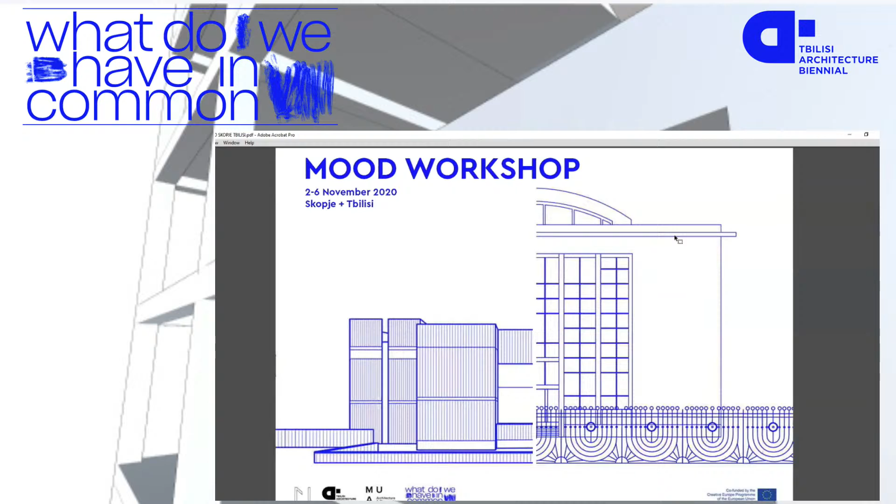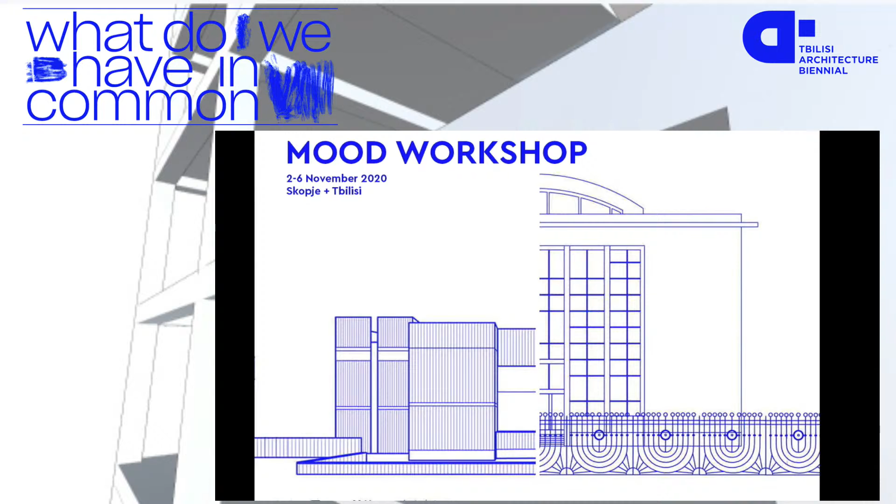I will start now with the presentation, sharing the screen. This is our main poster, which was firstly the building and location of Skopje, but now we made it half and half, with half of the building in Georgia. So the aim of this project was to present a partnership program between the two cities, Skopje and Tbilisi.

I will start now telling you about the location in Skopje. It's a student dormitory, the biggest student dormitory in the country, characterized by its brutalist architecture, which is very popular recently and attractive to foreigners also. But unfortunately, the public space around the building is very poor with activities that can bring youth together, first of all, and then other citizens.

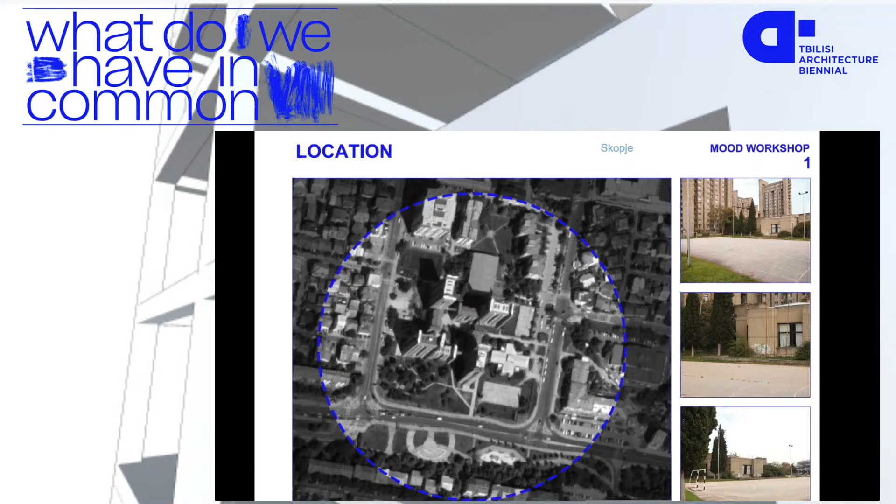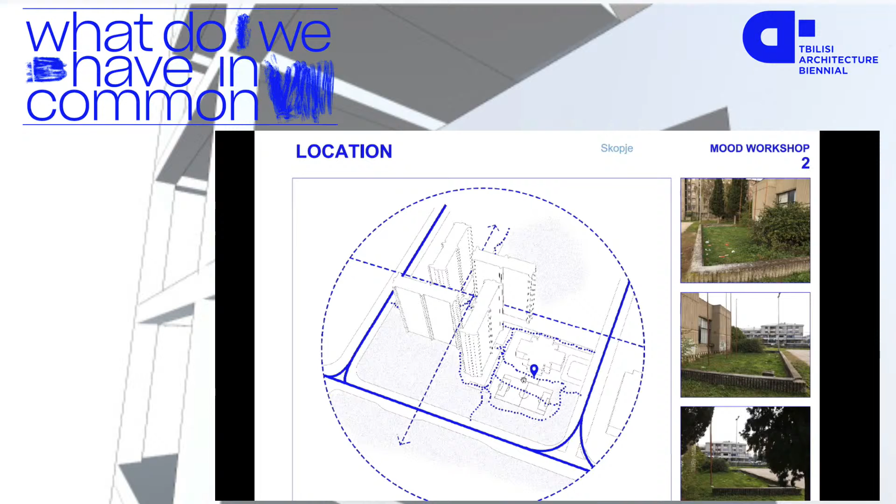Students analyzed the space around it and understood that the main movement around the place is pedestrian movement. This is something we really appreciate about our location, so we chose this small corner in front of the restaurant, between the restaurant and a football sport playground, to be our location. Now the students will start speaking about the project.

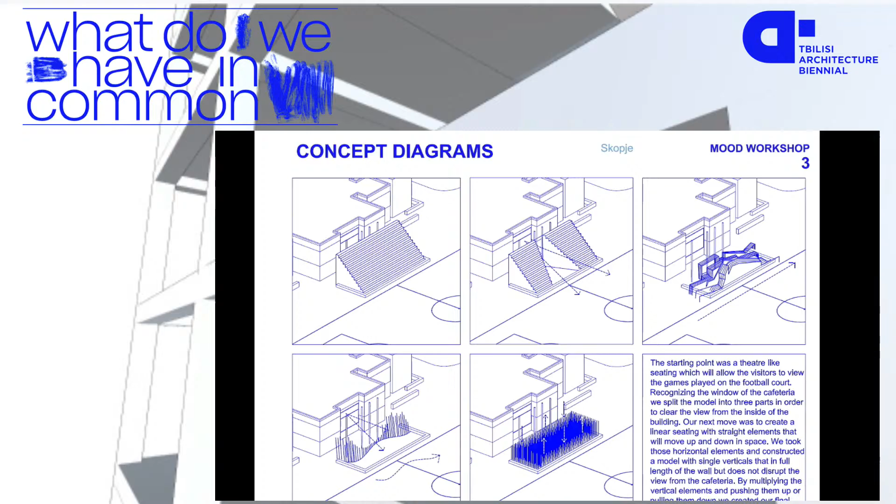Anastasija, are you here? Hi, sorry, can you hear me? Yes. Okay, so this is the process of how we got to our design. The first analysis is a classical theater, so we tried to make seatings for people to be able to watch games played on the football court.

Then we realized the cafeteria in the background has a window facing towards the playground, so we thought of opening up the space and not blocking the views or daylight going into the cafeteria. Then we tried some models with linear seating elements moving in the space up and down. We took those linear horizontal elements and turned them into vertical linear elements, going like a wave from a tall point to a short point and then to a tall point again. We tried multiplying them and pushing and pulling them up and down, and came to our final model.

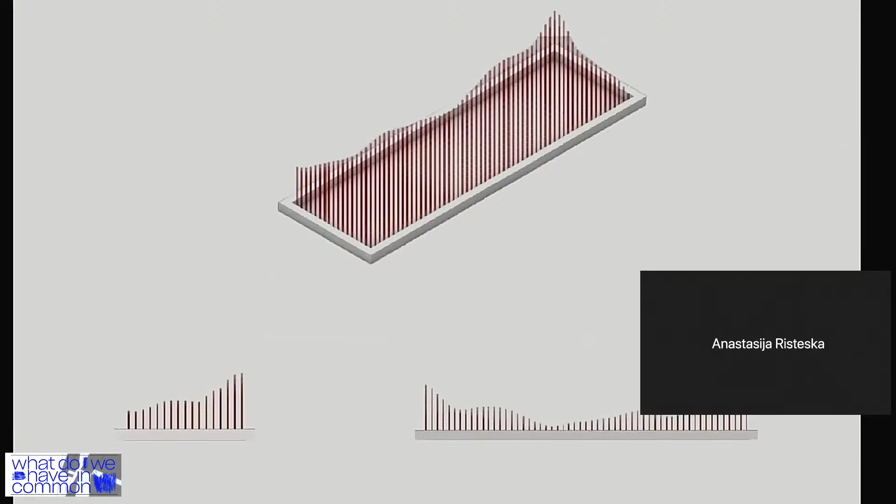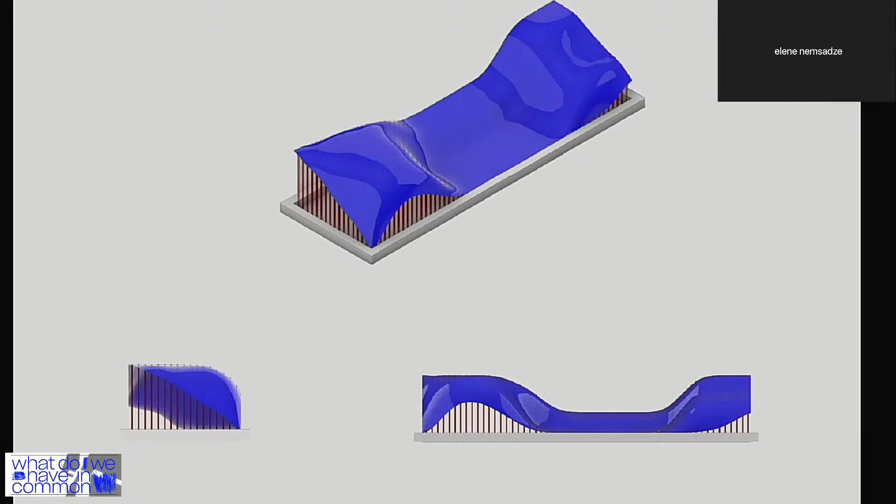Elene from Tbilisi: our group started to play with the forms to find the right one for the mood and atmosphere, and to match it to the facade, or to find the right shape. We tried a variety of possibilities, combining vertical and horizontal lines together to somehow find the right design.

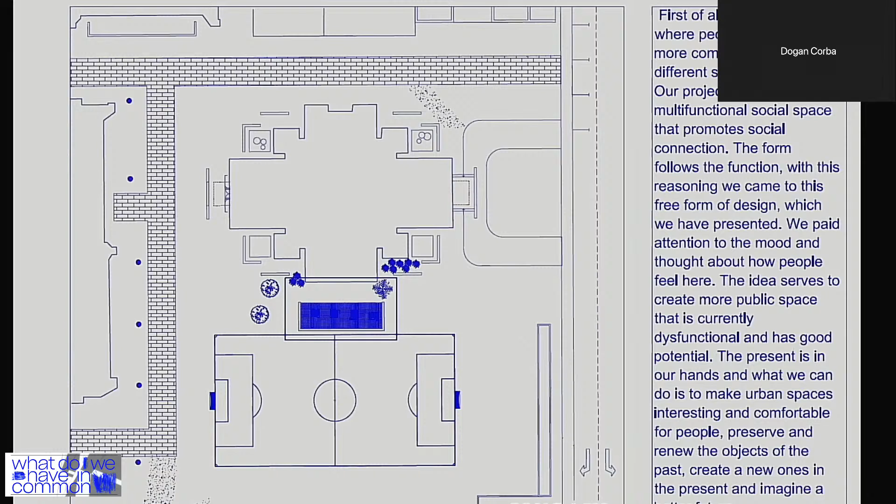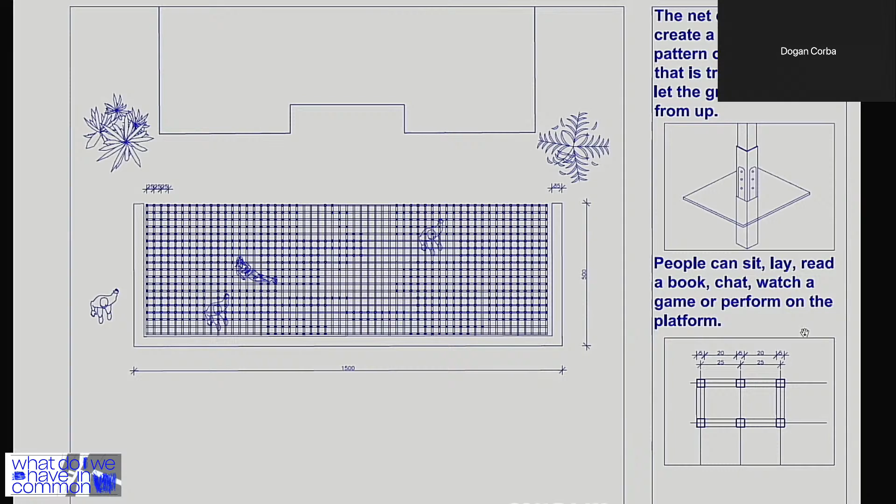In this slide, you can see the close-up situation of our location, which is 15 by 5 meters. When we look from above, it looks like a net, which can be symbolized as connecting people and the different heights, the different moods of people. On the right bottom, you can see some details showing the distances and dimensions of the wooden columns and how they're connected to the ground with metal bases.

This dynamic as well as transparent form gives you the freedom to behave the way you feel and use it in the way you want.

The model is functioning like one single monumental sculpture with its wooden structure, which unites with the green environment or nature, but contrasts with the surrounding concrete buildings. Still, by the section, you can feel the modularity of the model with which we intervene and bring a new soul to this space. And somehow we let the facade that is in the background breathe and do not hinder its visibility.

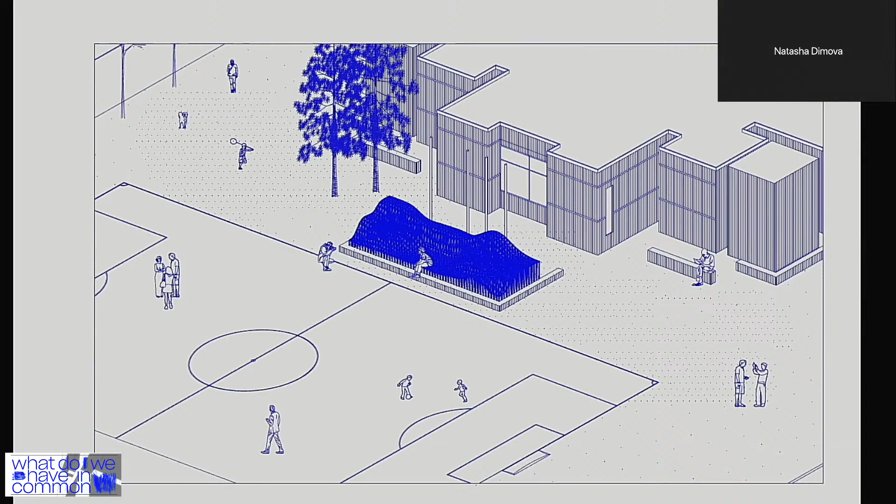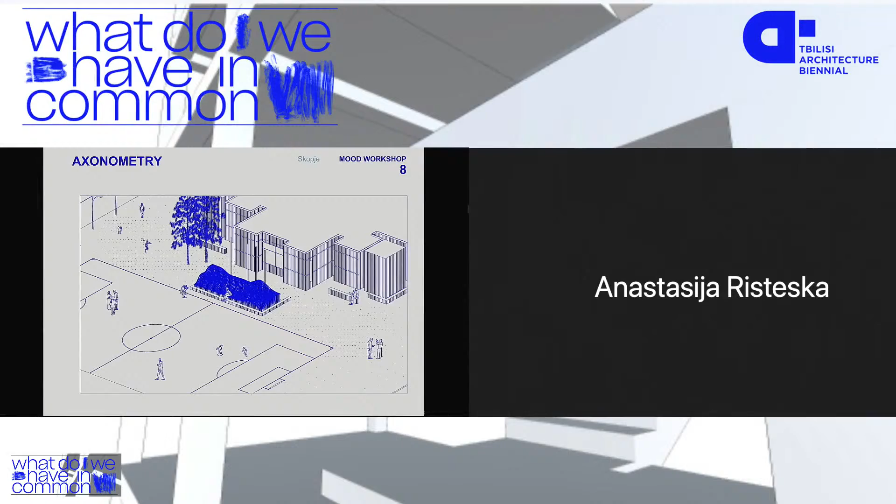Here we can see the model in visualization. We can clearly see that it's not blocking the cafeteria in the back, and also we can see its connection with the surrounding.

Our structure is representing the wave and the hill at the same time. It can be seen as you wish. It can represent the chart of different moods, or even the way of how the music spreads from the middle point, which can be used as an actual scene for many different performances. The wave follows the amphitheater geometry, and it represents the place for the audience which is watching the events on the field, or point of view and place for performance.

Sarah, we can hear you. Tamari and Zizi, if they want to add some words at the end, like a conclusion.

Our goal was basically to create something really simple and minimalistic, but yet it should have been dynamic and vibrant. So yeah, this is the idea we came up with, to have static pillars which create various curves along the original concrete wall.

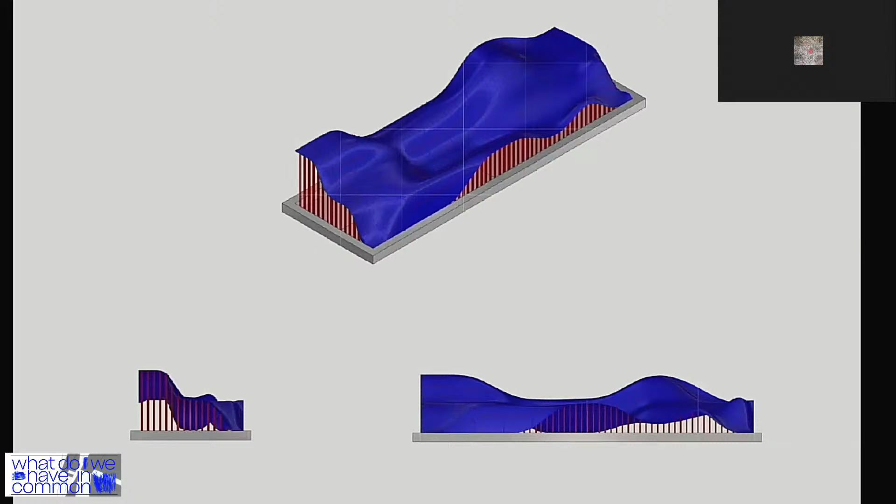This design is really transparent and light, but also it kind of resembles the surface of the building behind it. And this is kind of an amphitheater, which can be used for various events, student gatherings, for hanging out, and so on.

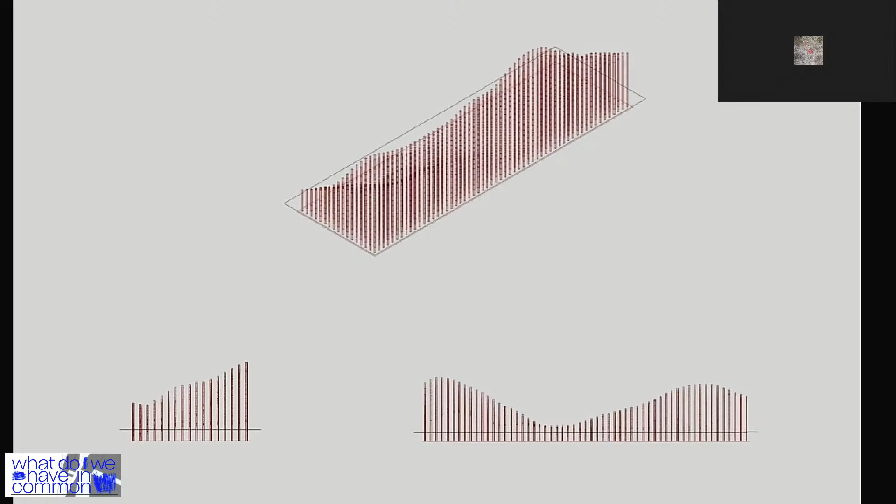Zizi? Yeah, that was me. That was you, I'm sorry. Do you want to add something?

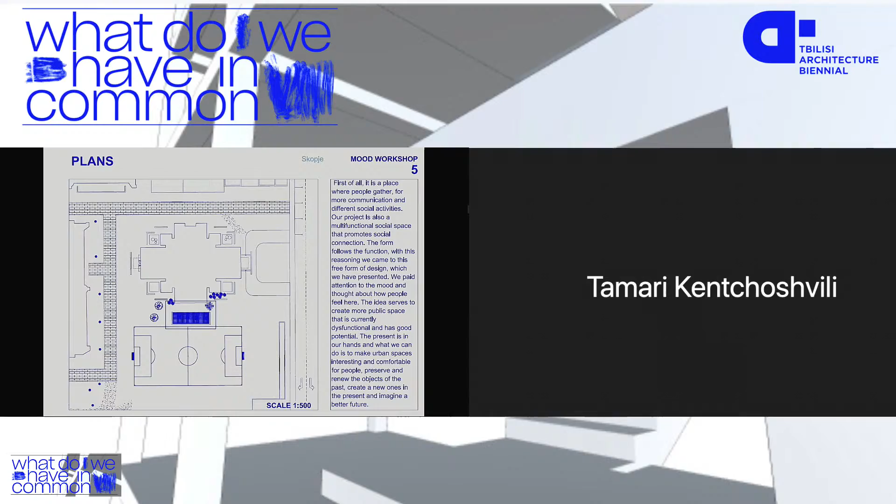The whole process was very interesting. We did a social, geographical, cultural analysis, and we decided to make this space interesting for people because it really has good potential.

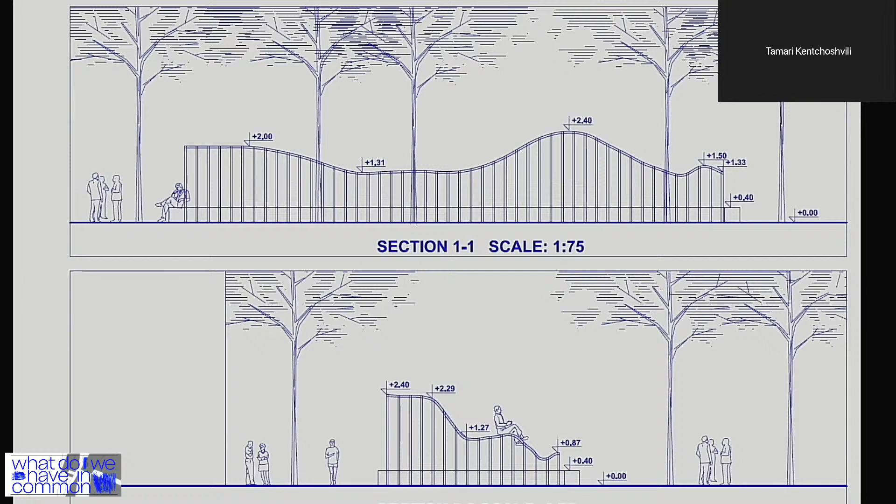While working on this space and this project, we started thinking about the concept of what we needed here. This is a public space, and we have discussed all the possible options of what serves the idea of a public space. First of all, it's a place where people gather for more communication and different social activities. Our project is also a multifunctional social space that promotes social connection. The form follows the function. With this reasoning, we came to this free form of design, which we have presented.

We paid attention to the mood and thought about how people feel here. The idea serves to create more public space that is currently dysfunctional and has good potential.

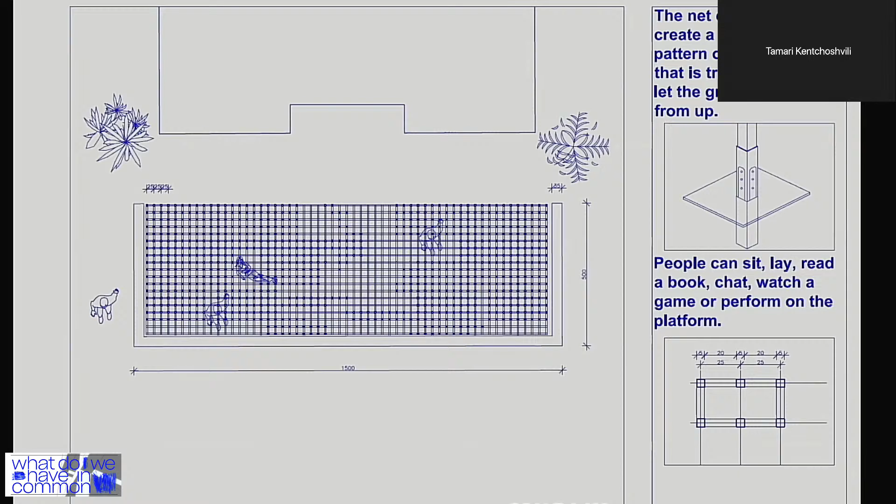We thought that the present is in our hands, and what we can do is to make urban spaces interesting and comfortable for people, preserve and renew the objects of the past, create new ones in the present, and imagine a better future. Thank you. Thank you very much.

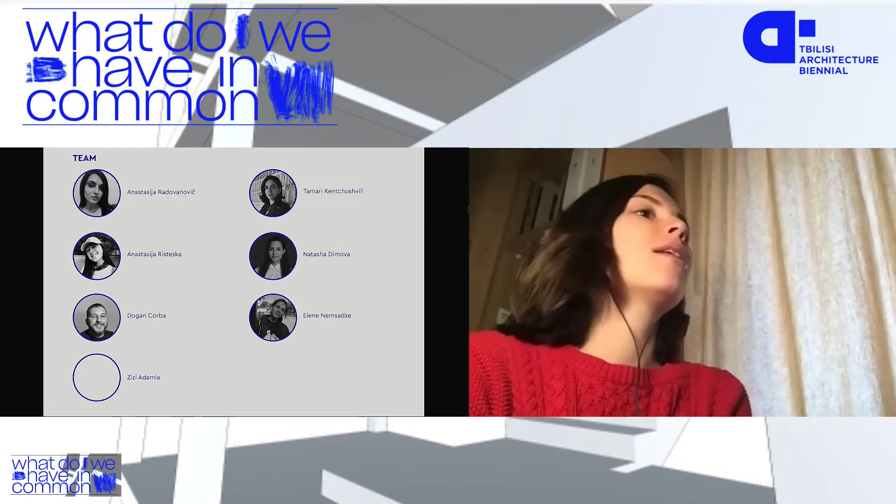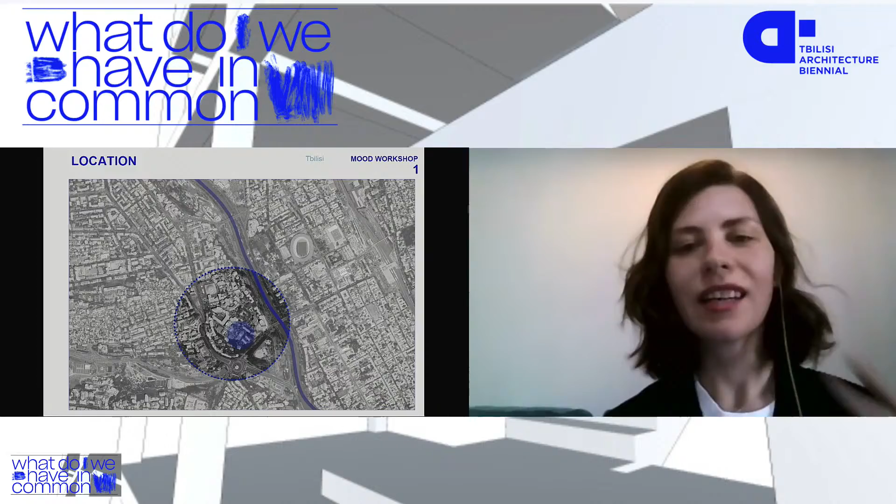It was really interesting to mix two countries and the groups as well in terms of this workshop. The most important side, we think, was the mixing and discovering some similarities between those two countries during the week. We've had many interesting speakers involved, telling us more about their experiences and sharing ideas, which was really, really interesting. We will also highlight that we think it went really well.

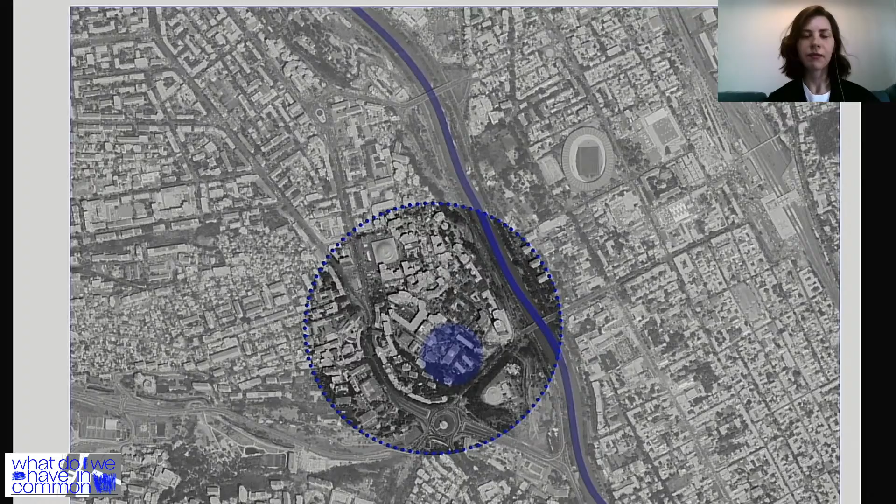So the site is one of the buildings of the Academic Gorodok, the city of academics, let's say, the science library. We chose this area because of its story - because now it is not as accessible as it was before, but it is still visited by the neighborhood, as it is in a very residential area. We wanted to make some challenges and try how we can make this space more attractive, more relaxing, or more interesting for the visitors of the library and the people who live in that neighborhood.

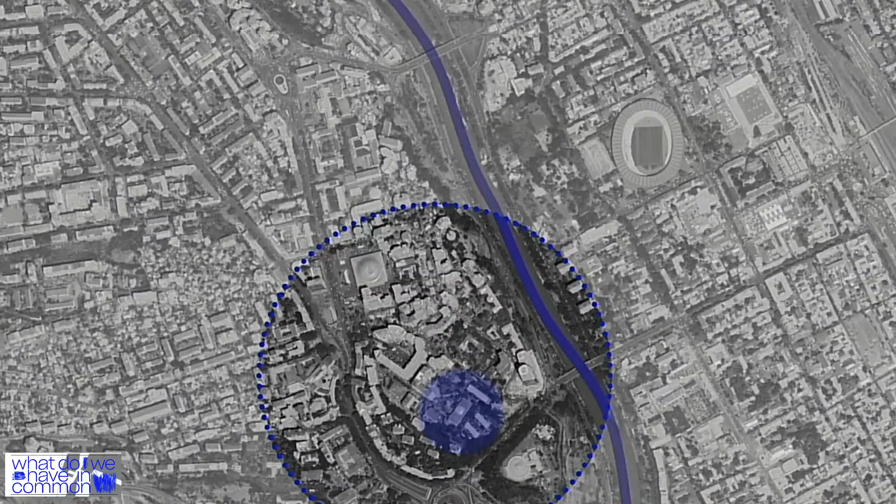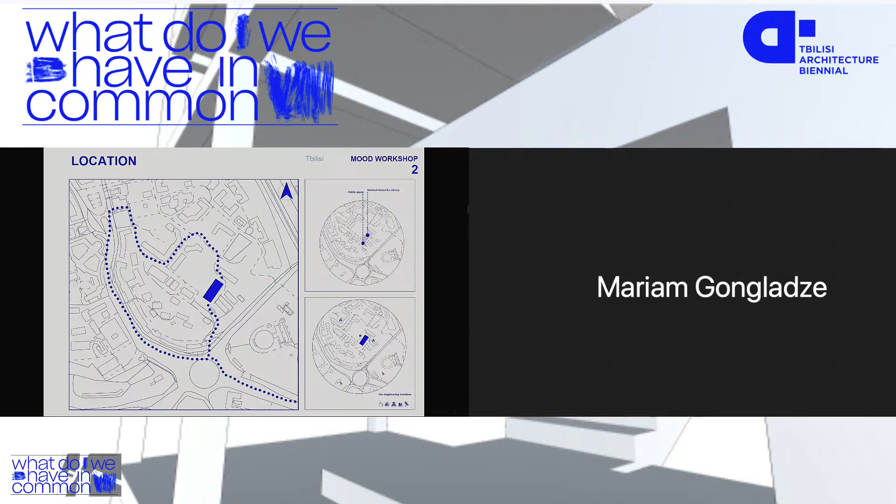So the team will present. Mariam, will you start? Yes. As mentioned before, our project site is located in the courtyard of the National Scientific Library of Georgia, which is located in a very chaotic neighborhood of Tbilisi. I want to mention that it is one of the busiest parts of Tbilisi, yet it can be isolated and create a very calm atmosphere at the same time.

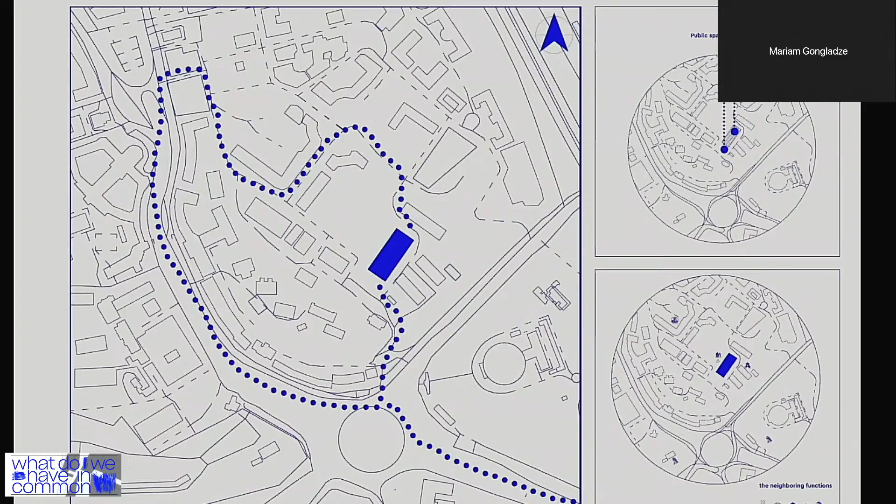One of the main reasons is accessibility, because currently it is accessible by two main roads, as you can see on the diagram - one pedestrian access and one vehicle road. For the context, as Maria mentioned, this was a former Soviet academic town project, and the National Library was established right after the USSR Academy of Sciences was founded. With the growth of the academy, the issue of establishing a fundamental library was raised, and it was positively resolved later. I think Elena is going to talk about it a little bit more.

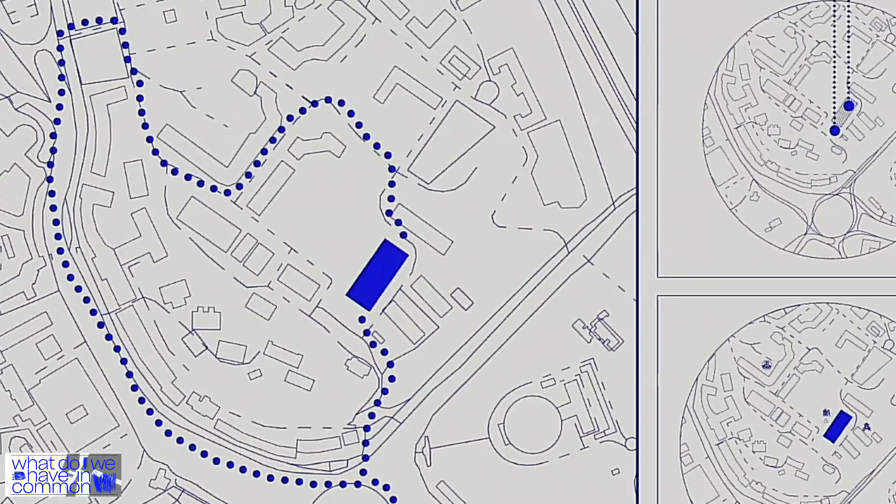Sure. This is now you can see the site of the building that we worked with. It was architected by Georgi Lezhava in 1970, and the surrounding project area that you can see now has a lot of different aspects that we wanted to show. First of all, the fact that it is mostly surrounded by residential buildings, and before the pandemic, the project area that we worked with was mostly visited by people who live in this area.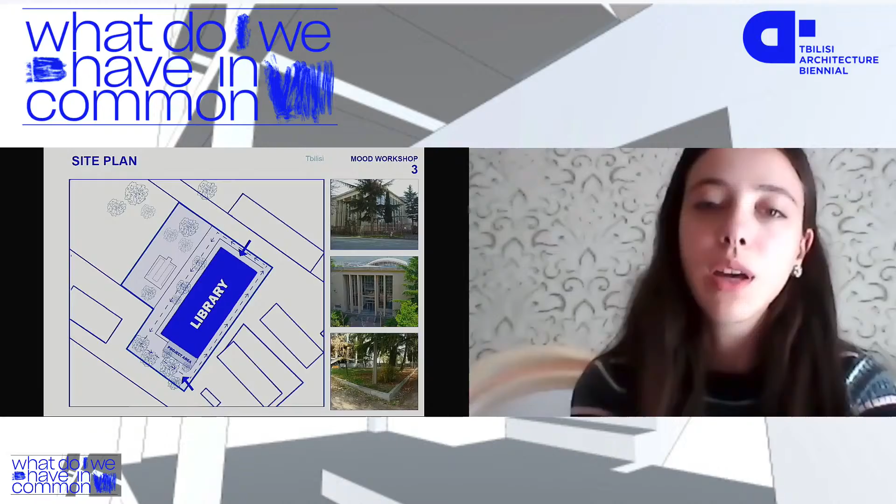Also on this map, you can see how you can access the library and the space. It has two entrances - one is when you can enter the library, and the other one is from the project area. There is a cafeteria, and as you can see, our project area can be accessed from the cafeteria itself, which is a very important fact for us.

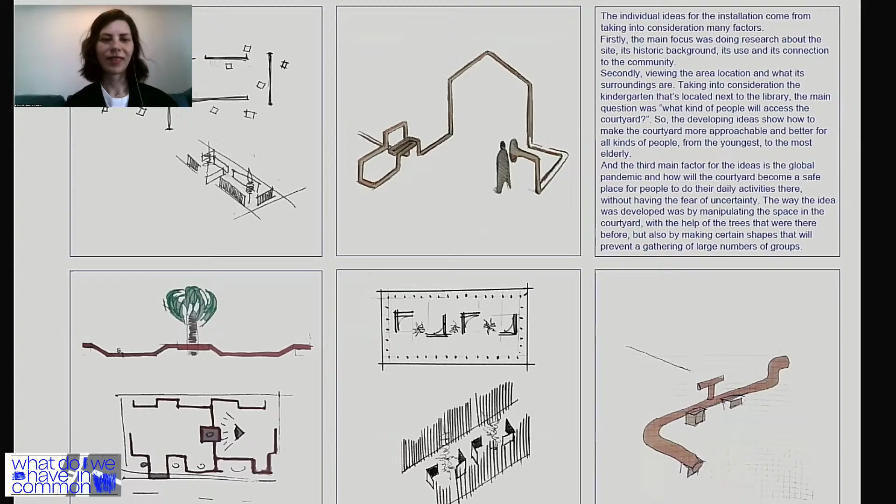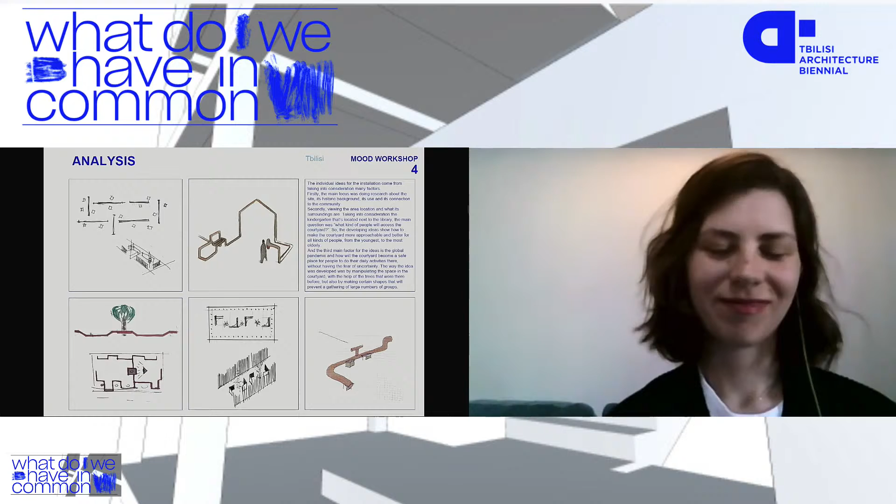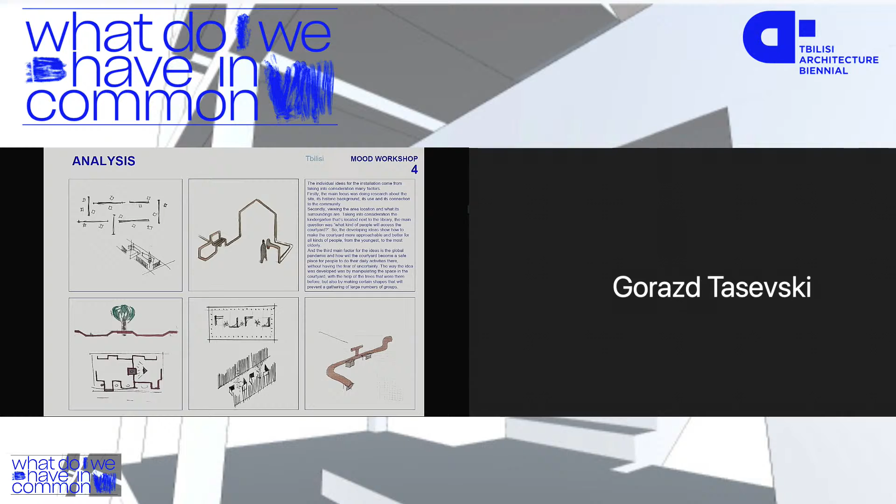Next page. Right, so the individual ideas for the installation come from three main points. Firstly, the main focus was doing research about the site - the scientific library, its historic background, its use, and its connection to the community. Secondly, viewing the area's location and its surroundings, taking into consideration the kindergarten located next to the library.

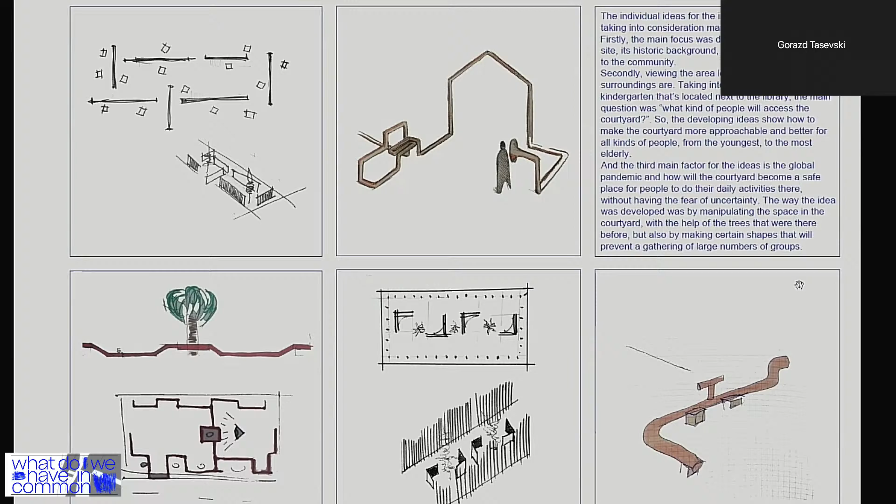The main question was what kind of people will access the courtyard, and the developing ideas show how to make the courtyard more approachable and better for all kinds of people, from the youngest to the most elderly. The third main factor for the idea - basically the most important factor - is the global pandemic surrounding us, and how the courtyard will become a safe place for people to do their daily activities there without the fear of uncertainty. The way the idea is developed is by manipulating the space in the courtyard with the help of the trees surrounding it, and also by making certain shapes that will prevent the gathering of large groups.

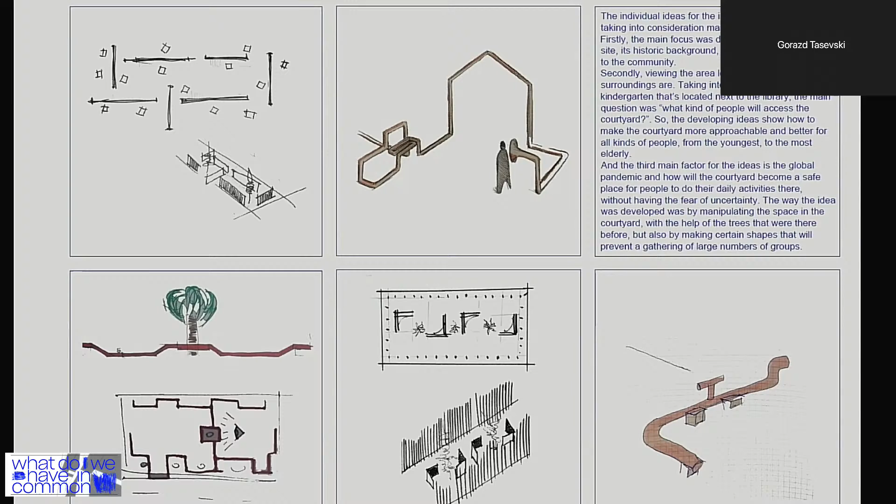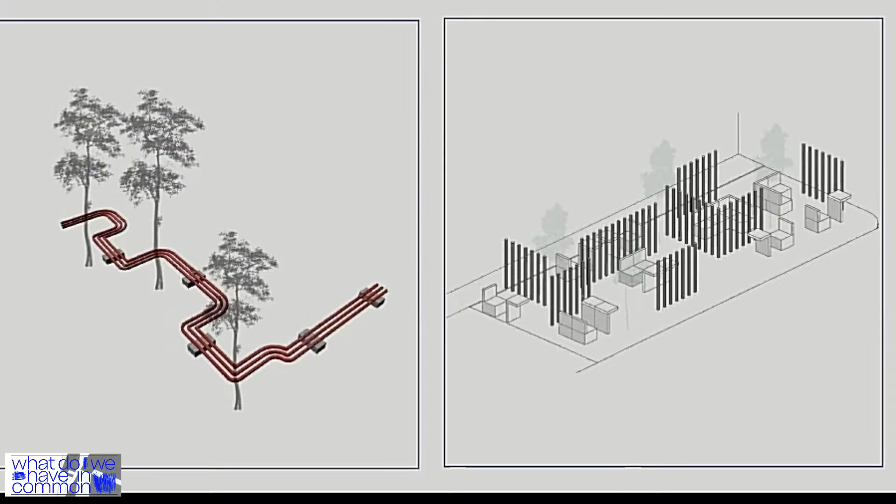Next page, please. The intervention is a confluence of the concepts of modularity and continuity, with the idea behind it being to bring the concentration of activities from inside the building out into the open. It brings attention to the courtyard itself and makes it more approachable for the community. There are opportunities for recreational activities such as play and socialization, as well as educational opportunities where visitors can participate in small-scale exhibitions, presentations, and take part in book exchange. The elements strive to achieve transformability through division and connection, and are able to be combined into a singular fluid shape.

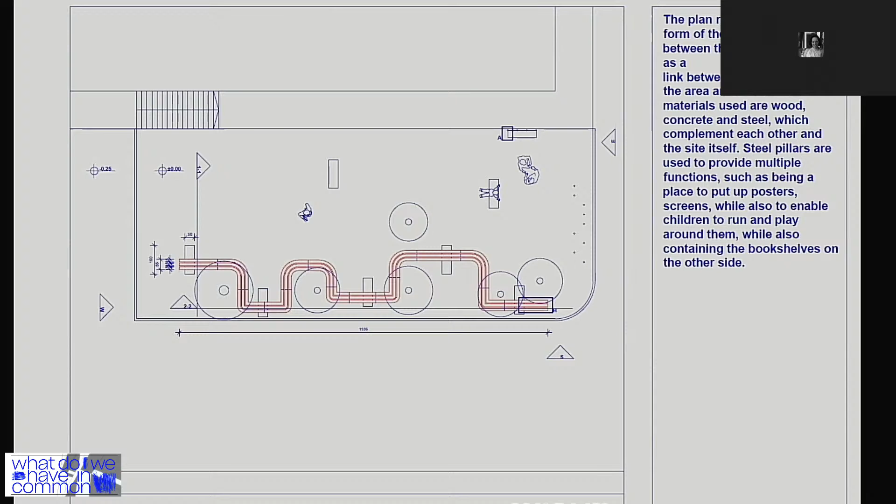As you saw from all the analysis before, this is the idea that came to be. The plan reveals the form that was decided to be taken, which is a continuous shape with a modularity. By modularity, we mean each part of the bench can be removed and taken to another spot.

The dimensions we were thinking of having it as comfortable as possible to be made and also to be used by people, in that way that it will be light and people can use it and misplace it however they want. The materials used are wood, concrete, and steel, and they all complement each other and the site and the elements found in the site.

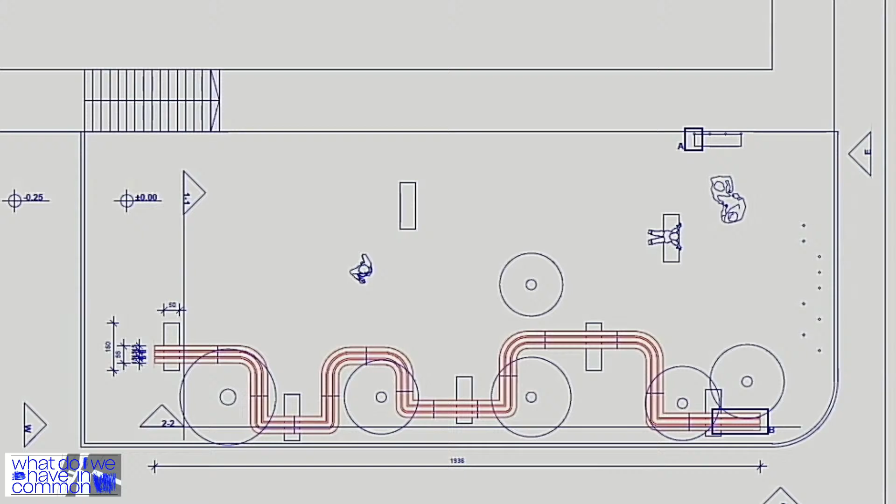The metal elements, which are the tubes on two sides of the location, would be used for putting screens, posters, or whatever it is needed to present, while also a spot for children or visitors to have some fun. The other tubes are meant for shelves, so people can leave books or take some books from the library, while the benches could be moved in place however they want, however it suits the location or whatever is happening there.

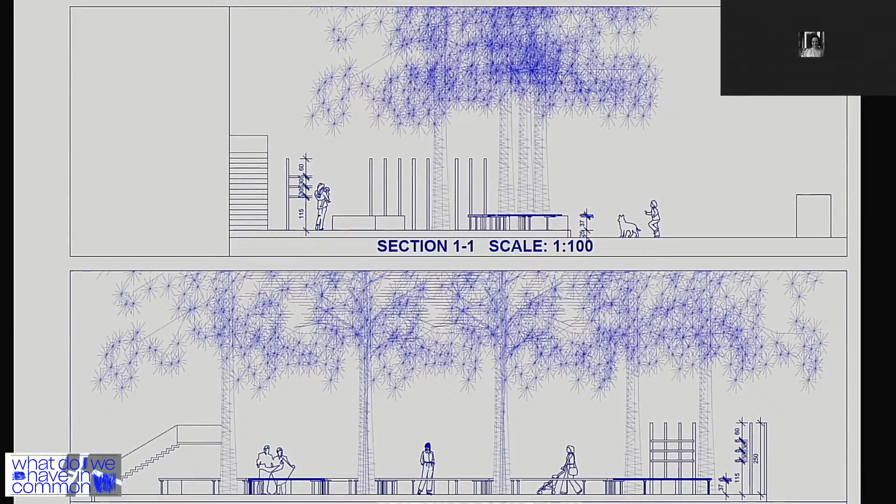In the next slide, you will see the sections and how minimal the intervention is and how softly it touches upon the location without imposing too much or taking the attention from the library itself and whatever is in the surrounding area. This is also presented in the next slide, which is the elevations or facades.

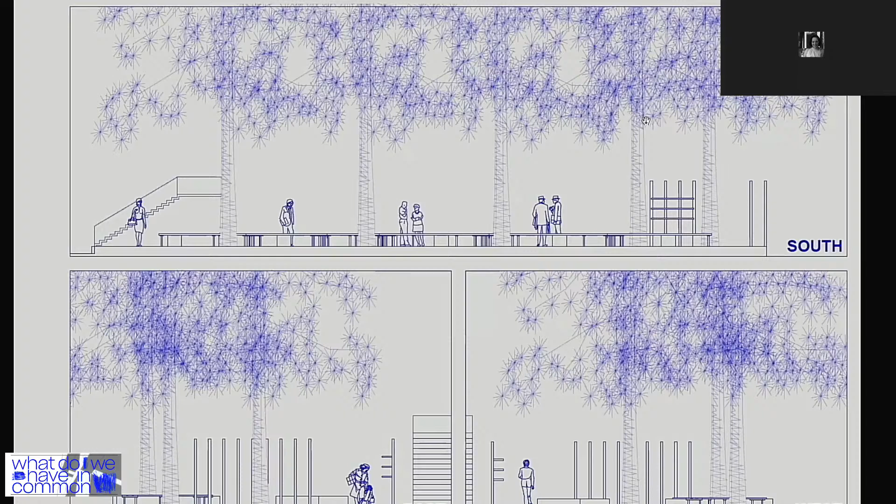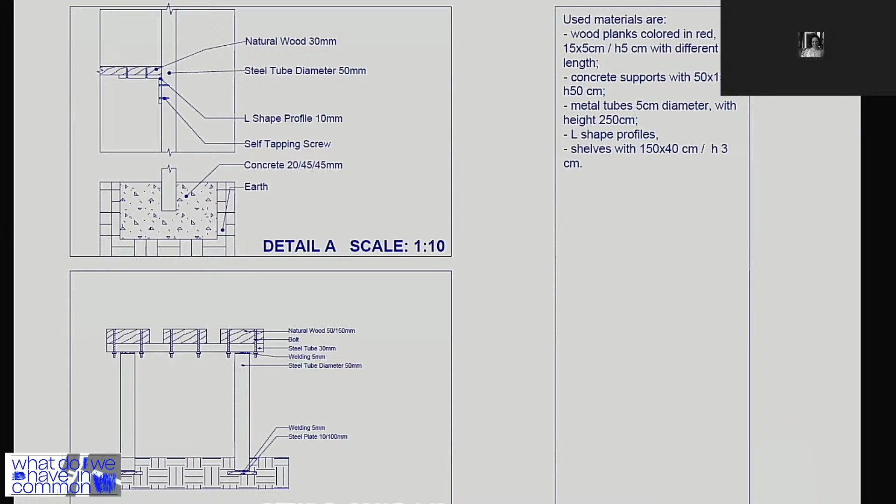And these are some of the ideas we had on how people could interact in the area. The next slide is the details, which we explained in detail, what kind of elements would be used and how they would be attached. The idea is to use natural wood and steel elements, which are very easy to find and very cheap to use, so it doesn't cost too much and it's not too hard for people to use and rely on it.

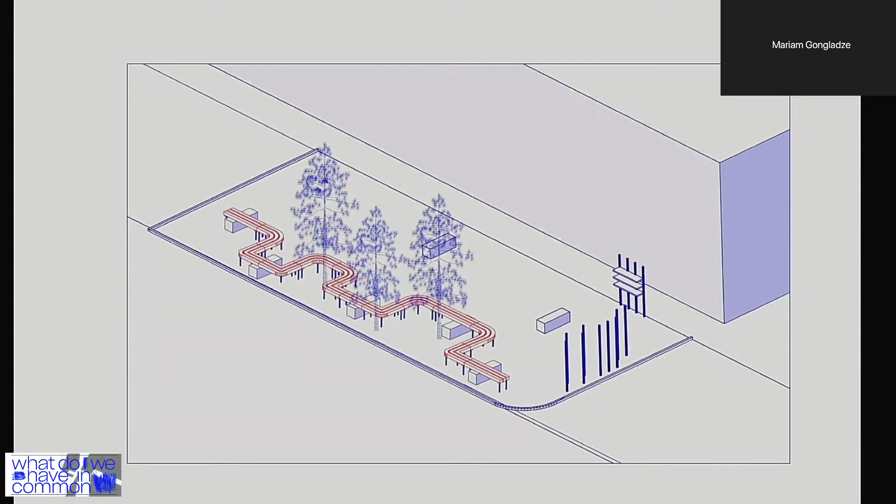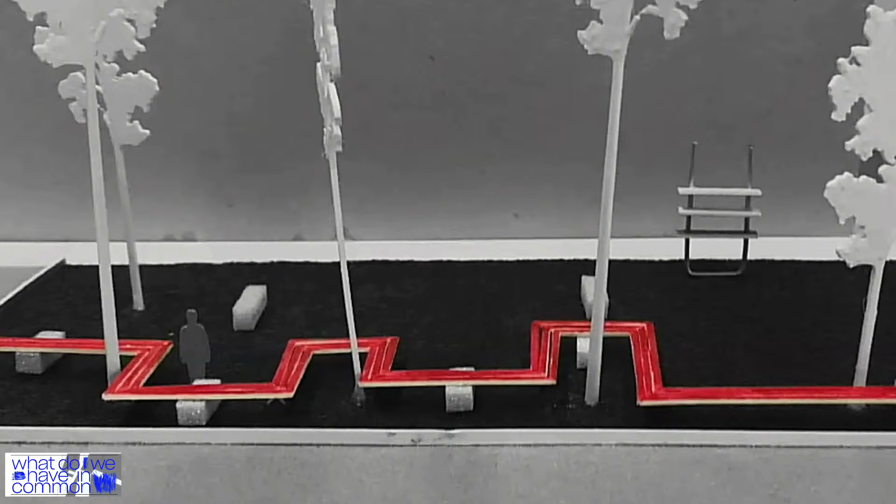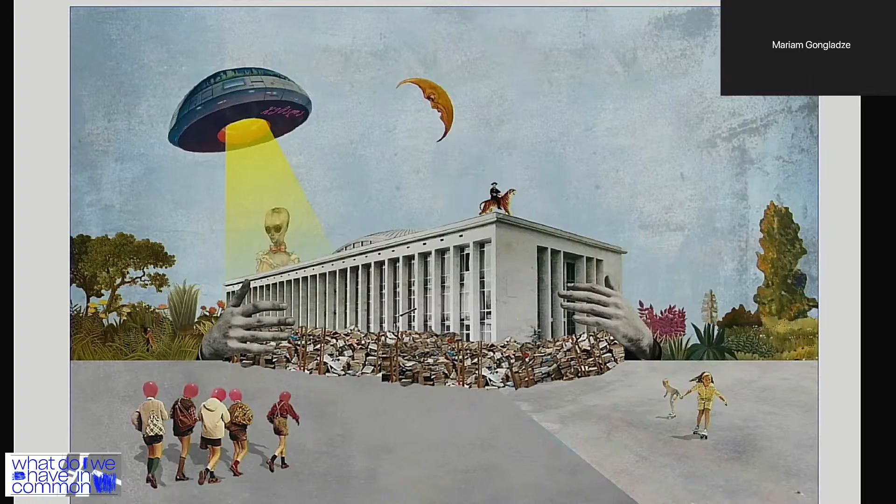These are also some models that we were working on during this working process, and some collages that we made for this place, and it shows our main target audience and the people that are going to use this place, the community space.

Yes, this is also a collage for creating the mood of this space in Tbilisi, and we assembled all of those collages together.

Thank you. This is the team that worked on the project. Thanks.

Thank you very much. It was interesting, a very nice thing together. Maybe someone who is following us now can ask some questions, and maybe also some of you want to comment as a final thing, something about the general work or whatever.

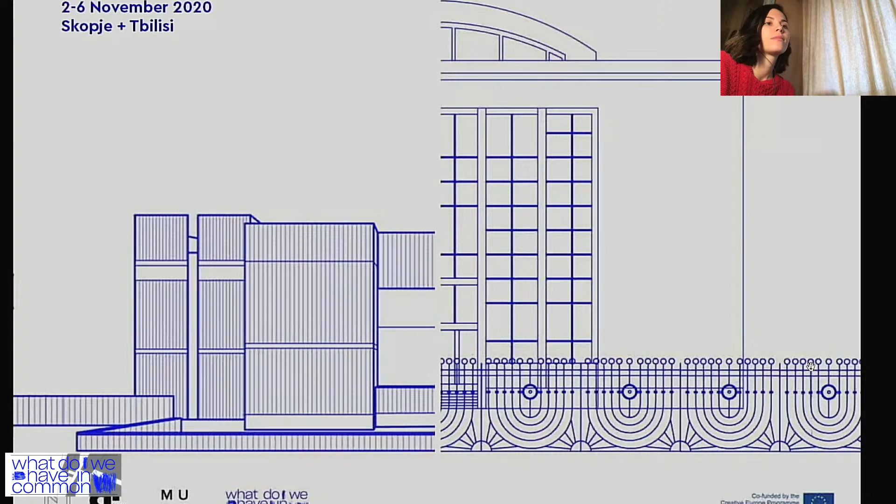Actually, we don't have at this stage the questions posted on our online platforms. How did you find working on the workshops in different parts of the world? That would be my question.

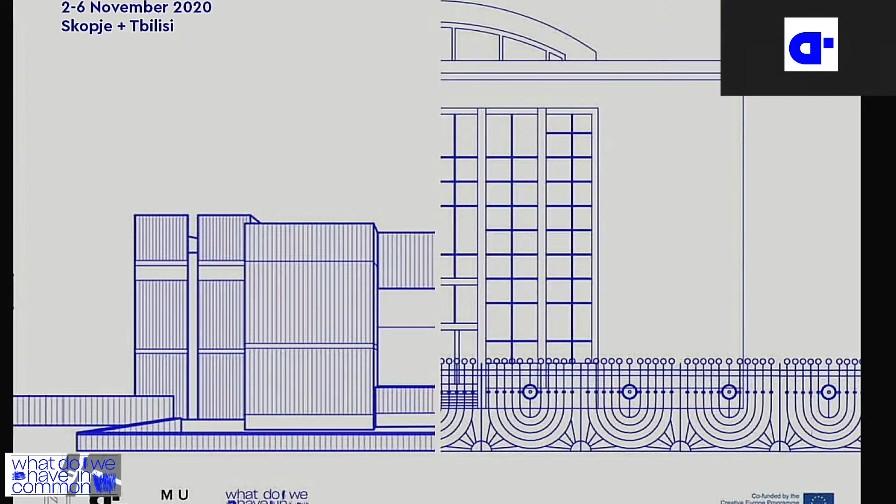Maybe some of the participants can answer.

I would say it was very interesting how limited we were in talking and communication, with everything done online, but we still managed to understand one another and contribute, getting our work done in a certain way. Personally, I enjoyed it very much, and I enjoyed working with the team; it was true teamwork, as I think every teamwork should be. I'm very glad that we got to see a different side of a different city, a different country, and a totally different environment, which is so different and yet so similar to ours. We touched upon many subjects, and in the end it turned out that we're not that different, that we have many things in common, even though we're in two parts of the world.

Great. Thank you. Is there anyone who wants to add on that?

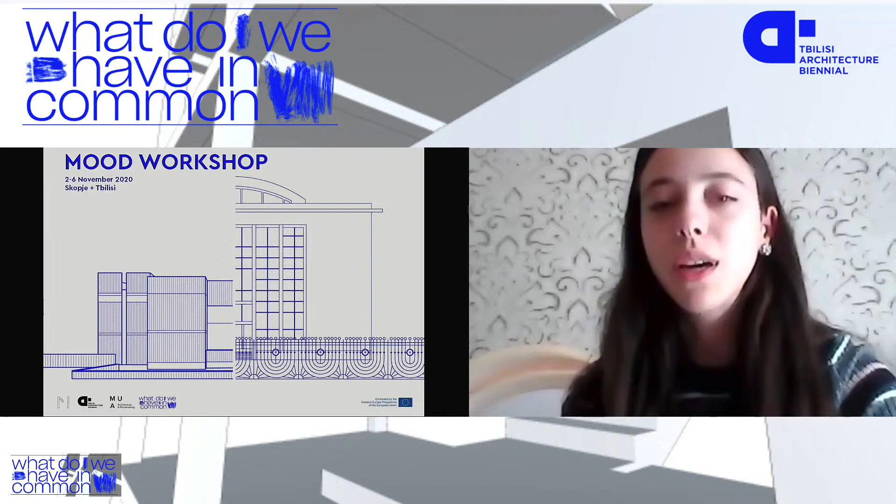So I'll just end here, and maybe the students also can share their thoughts on how we came to this. I can say a little bit about how we were getting inspired. First of all, it was the building itself and all the surrounding areas. We started our idea with research and tried to find some shapes and forms that would connect us to the library even more. And we came up with this idea of a pool and the structures that were inside, and somehow recreated it into a new project.

And how about the team in Skopje? I have been in Skopje once in my previous experience, and I found it quite an inspirational city. I think you could find a lot of places with inspiration there, especially for this workshop. But what was your inspiration in that case?

Someone from Skopje wants to say something from the team? Actually, we were inspired by so many things from different aspects, first of all our building and the surroundings. Then we started to think about the workshop. It's called Mood, and we decided to see how moods can affect our inspiration, and we started like that, and it led us to this point.

Does anyone else want to add something, Sarah? Yeah.

Maybe I can ask the participants also, did the speakers also inspire you in some of the design process? Was this important, or do you think we could have done the workshop without the morning lectures? How was your feeling about that?

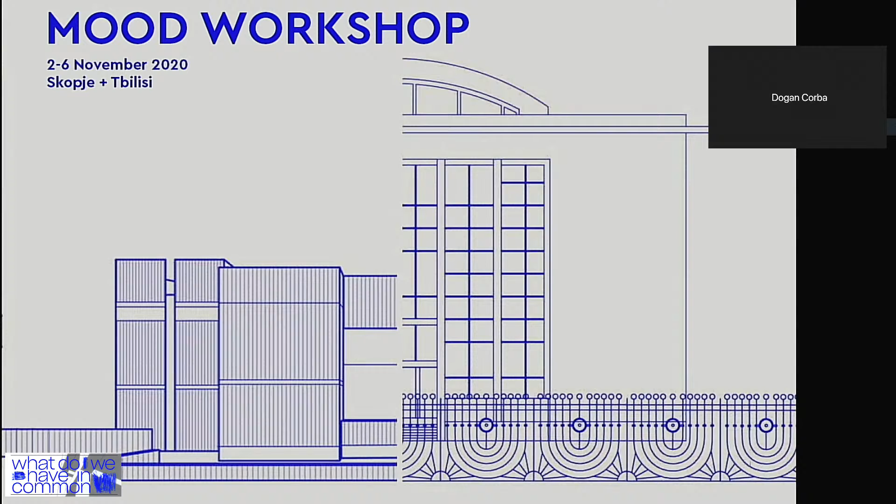Okay, I will ask again. What are the next steps, if any? Or do we close the workshop with this presentation? Do you foresee anything, rather than having it on a physical space presentation, for the continuity of this workshop?

You ask me? We can start with you, and then we'll ask George and Tim also. So the general plan is that these installations will be built up. We have some budget for it, but maybe this budget will be short, so maybe we'll work a little bit to find co-finance for the interventions.

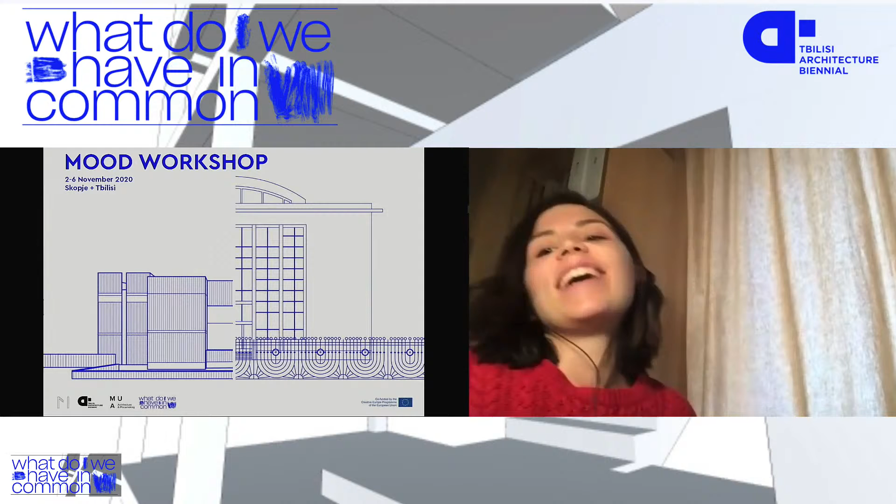So we will meet all together next year, hopefully physically, to build up these installations on site. And we hope that through this long process from design to building, maybe we will become like a big international studio, a big Mood family, that hopefully some other small groups will start growing inside, and people start connecting, and different stories will get born outside of this project. So we just don't know. We just put the seed into the ground, and we will see what we'll get from it.

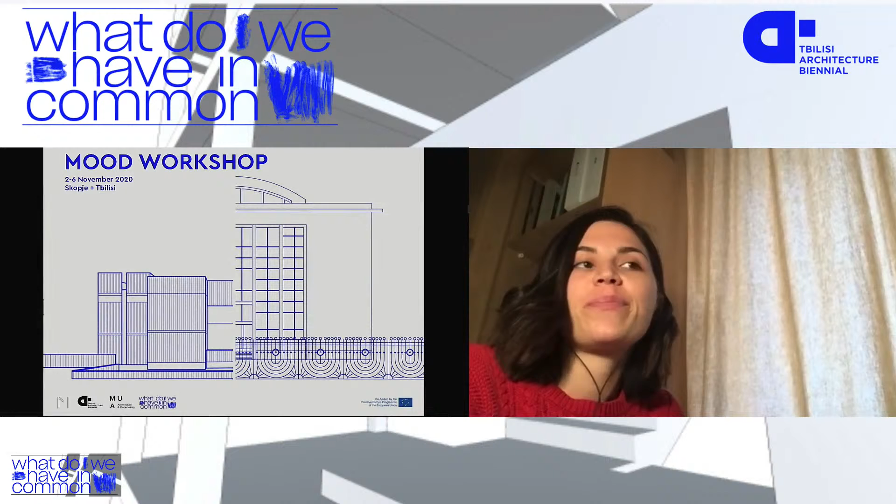Great. I think this is a very interesting workshop, and one of the participants, apologies, I don't remember the name, already mentioned so many things we have in common, and at the same time so many differences. There is another question from Mu Architecture and Placemaking.

Natalia, is it you posting the questions? Asking what were the challenges you faced working online? So it's maybe not me, but we'll start our answers with you. Maybe. What were the challenges, is the question.

Well, I think finding the similarities and differences was one of the challenges, but it was really also inspiring how during the process we all became very close to each other. I think I will miss every one of the guys who were participating in the workshop. I don't even imagine how I'll start my day tomorrow without them already. So yeah, it was really challenging to produce work with a team you don't know.

When you don't know people and you just meet them for the first time, you're moderating the ideas. For me it was challenging to somehow take the best from everything we had on the table, and I think it really went well because the team was very flexible and the ideas were transforming into something more in a very fluent way. With the result I'm very happy, because we had different discussions about modularity and continuum and how it should be realized at the end. I think the combination of ideas we presented was the best of the team's work, and I'm very happy about it.

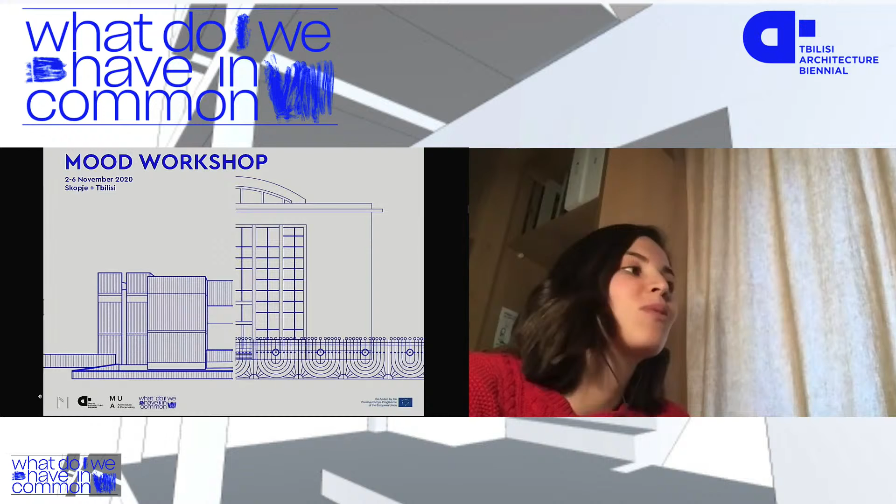No, I just, for our group it was interesting because we were playing music and this kind of stuff. We wanted to feel like we're in one room. I feel like I know the people that were in our team. We connected in the last two days especially, on some virtual level. I don't know where, but we connected, and that's what makes me feel these people. I don't know how they really look, maybe someone is very tall, I just know a little bit of their face, but it doesn't matter. I really feel the people. So it was nice. COVID didn't stop us, so yeah.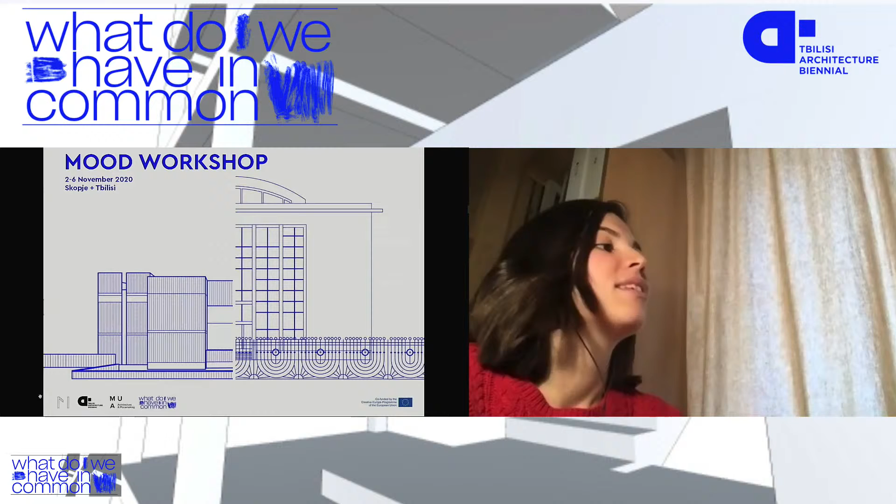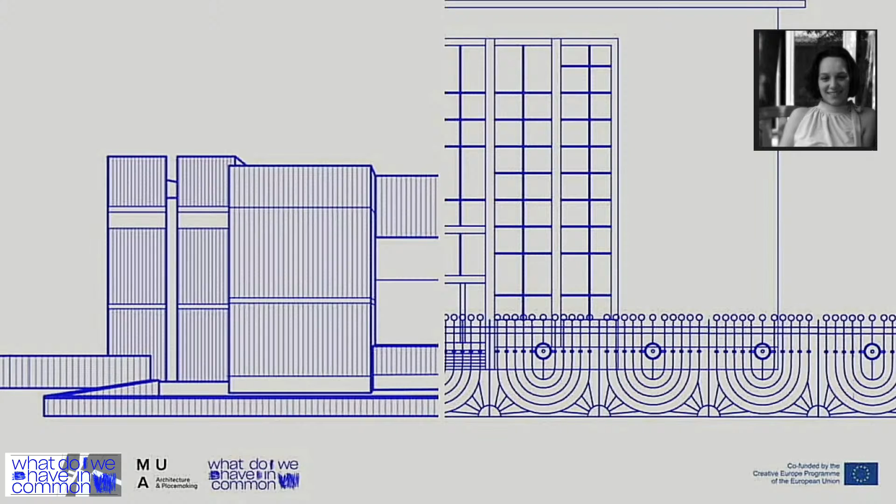I would like to say thank you all for this opportunity and for making it possible for us to be part of these workshops, whether in Skopje or whether it's the Tbilisi team. I think we all had fun, and we could see that even online workshops actually work. We don't have to be always present there, even though it would have been maybe more fun and nicer. But I really like to thank you for this opportunity and for making it possible for us to work and be part of this team, even though we're in different places at the moment. But hopefully we can come together as a group or as a team and make the project ourselves. So thank you.

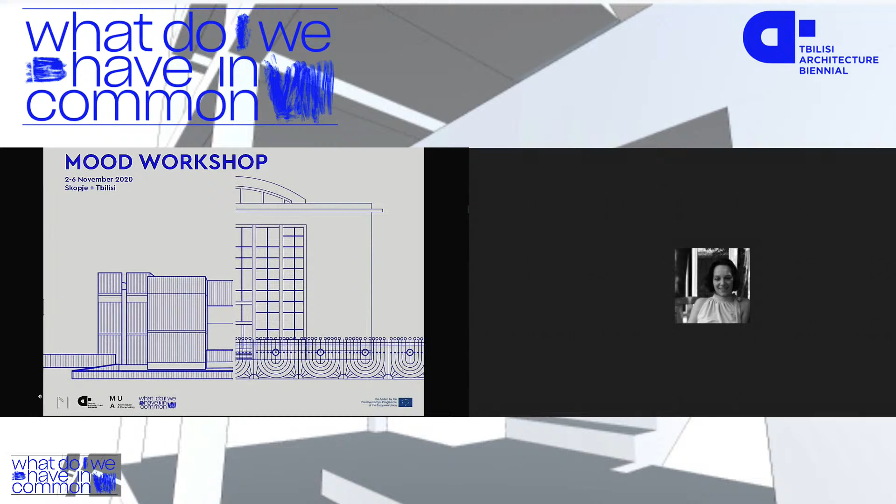Also, I want to add how thankful I am for this opportunity and how international cooperation is really important. Different points of view and everything. And I think it's amazing. We did really great job and I'm proud of us. So that's it. Thank you.

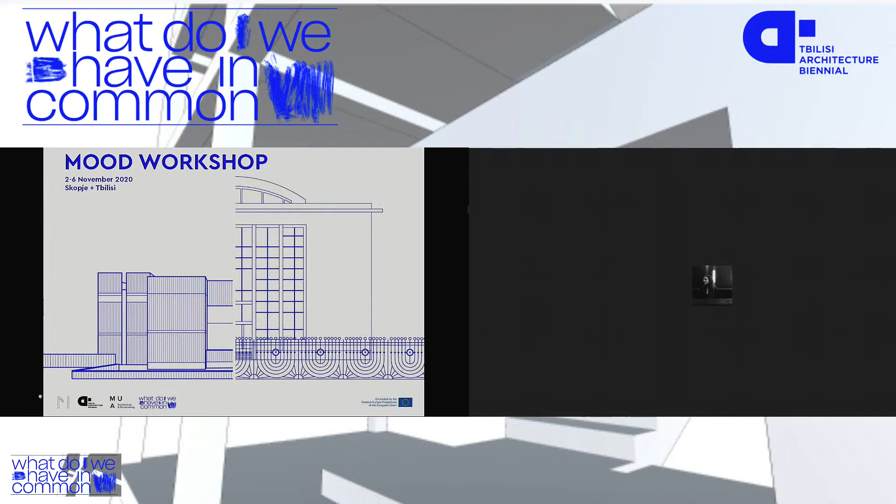I also wanted to say that I'm very proud of the model that we did, the design that we did, the way we did it, and I want to say thank you for organizing this kind of workshop. It was really fun, and I think we all learned a lot.

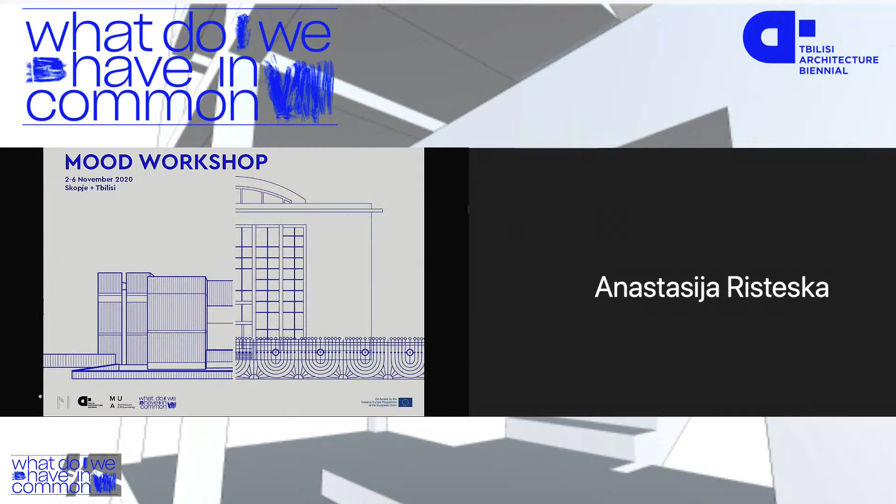In frames of international interaction of the professionals and the workshops, I think first of all, we have to thank Biennial and thank you guys for doing this, because all this time that Biennial has started until today, and I think it will continue. It has been a pleasure to follow all the events and lectures and so much work that you did in this time, and it's really a great opportunity, and I think to do it online and open so much for new communications and new interactions is a brilliant work. So thank you again.

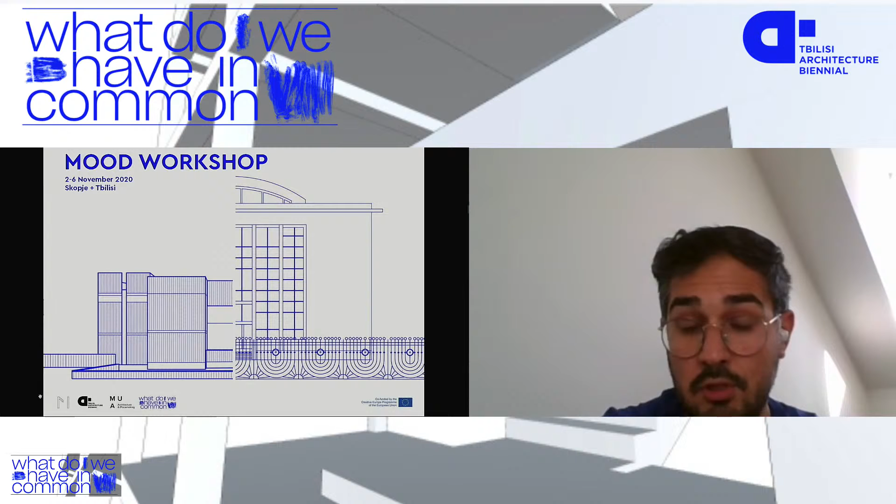Thank you. On behalf of Tbilisi Architecture Biennial, we are really happy to have the projects and the workshops that we just saw. Actually, I was looking at the workshop and thinking that this is exactly why we do the Biennial. And I really thank you all for this dedication, for your inputs. It's quite challenging to work these times, especially in two different cities online with something more important to take care of at certain stages, and I think that the results show how important the work we all do is.

And it's not about the Biennial today, it's really about you. And I thank you once again, teams in Tbilisi and Skopje, for this dedication and work. I really hope that we will meet physically next year in Skopje and in Tbilisi, and we will continue to take this workshop from that point.

Thank you again. I wanted to suggest if you want to turn on your camera so we can take a group photo or something like this, if people want to, not obligatory. Yeah, yay! Show your face. Thank you. Okay, wait a second. Yeah, I don't know. Before you take a picture, yes, I wanted to wish you all...

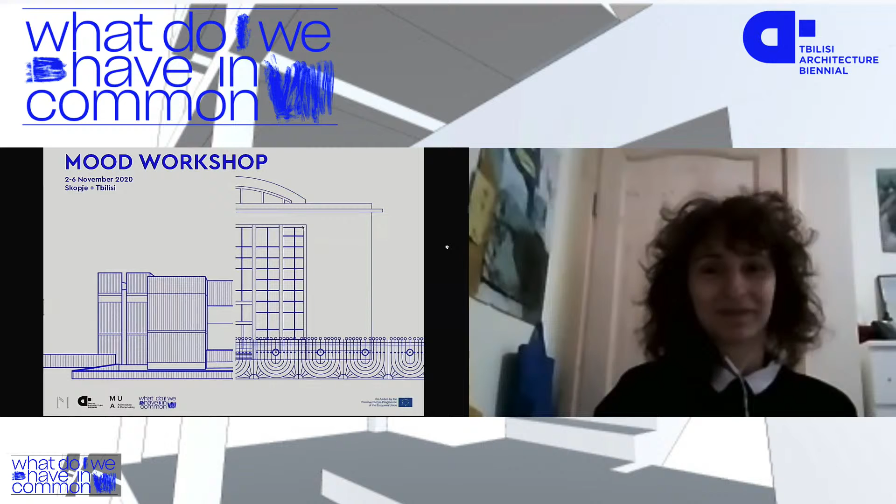Maybe there is someone missing, Ivan Todorovsky and Valery. No, okay, Sanya. I can't because I don't have a camera on my laptop. Oh, sorry. Okay, just Tamar is missing. It's okay, Tamar is okay. Cool, thank you guys, I'm taking a print screen now. And wait, there are 2 pages. We are so many people. Cool, wait, why didn't you tell us the pose?

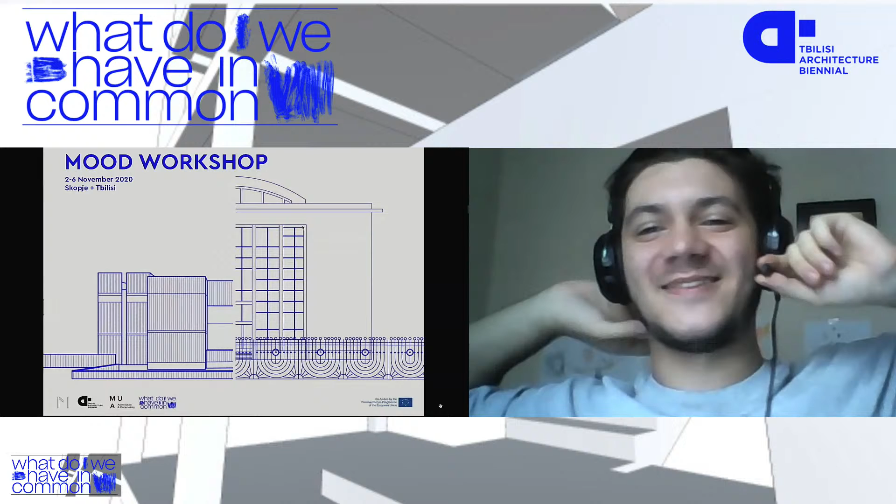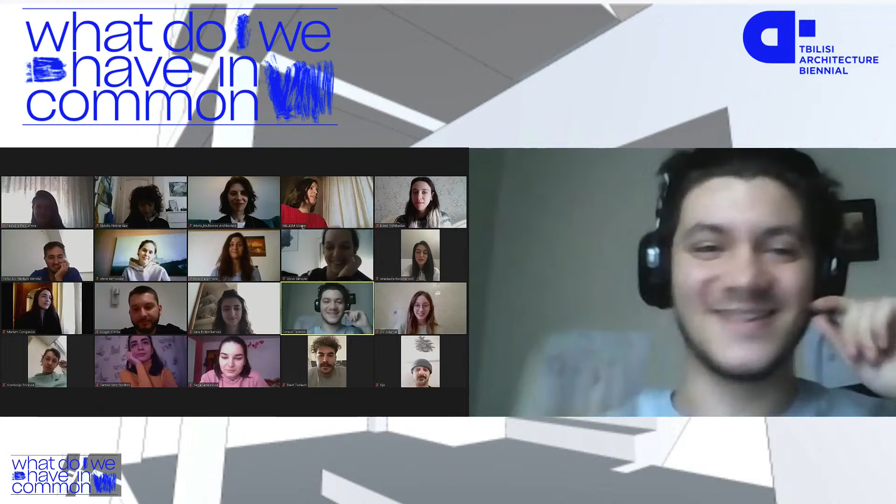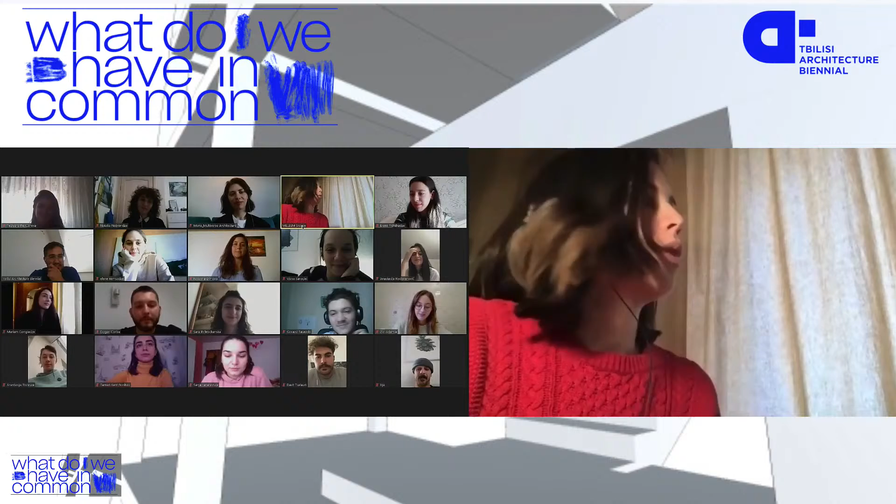Theodora, can you also take one print screen, please? Sarah, tell us the pose. Which is the pose? Tell me, tell me the pose. Oh, I don't know, each one can have their own, but tell us 3, 2, 1, and print screen. 3, 2, 1. Do whatever crazy you want to do. You didn't do crazy faces, guys. You're not fair, this is not how we're playing. Okay, let me first save the first one. And then the other page. There is another page, how to go? Okay, like this, one more time. 2, 3, 2, 1.